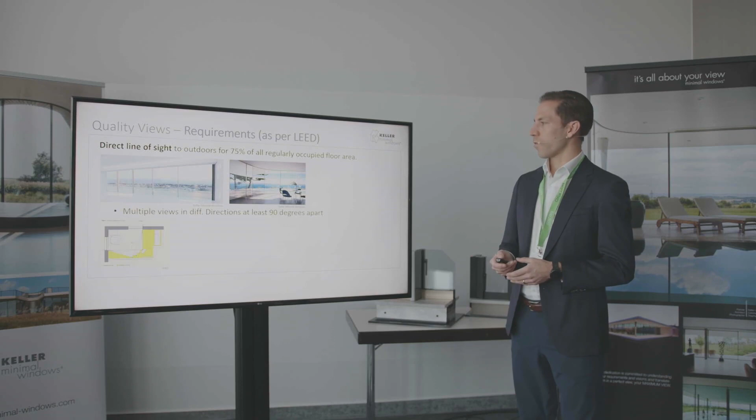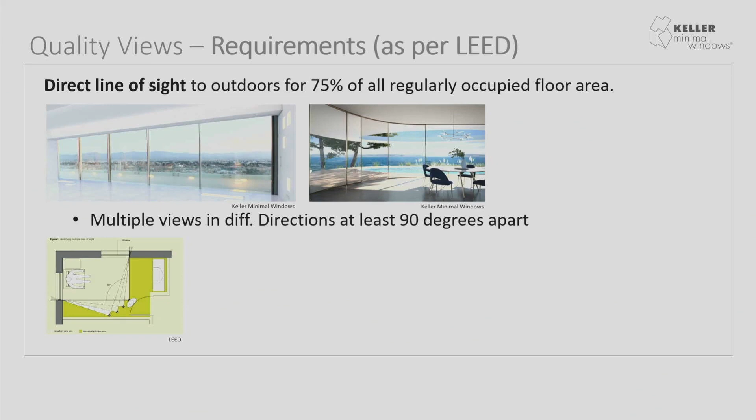We also need to have more than one sight line. So it's not enough to just have an opening right in front of us. We want to be able to pivot about 90 degrees and have a view that direction as well. It is associated with benefits to our well-being as well. And this would be an example of these two 90-degree views.

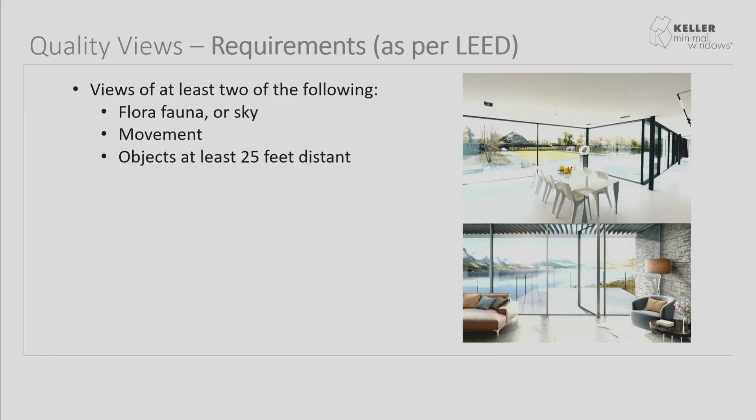Now, another requirement is that we meet at least two of the following three categories. We have to be able to see flora, fauna, the sky, movement, or objects that are at least 25 feet in distance. So it's not enough to have a big view, but a building right next to our building where we just look at a wall, that's just not giving us enough relief. And we can kind of see here where we really create that environment and feeling.

We also have to have an unobstructed view located within the distance, and that view has to be at least three times further away than the opening. So if we have a floor to ceiling opening that's about 10 feet, then we want that object to be at least 30 feet apart.

The third category is the view factor, and it's essentially rated by the angle of the view. We have to have a view factor of at least 3, which is between 1, the least, and 5, the best. The further our view opens apart, the more improved the well-being is. And so at 3, LEED considers this to be a quality view.

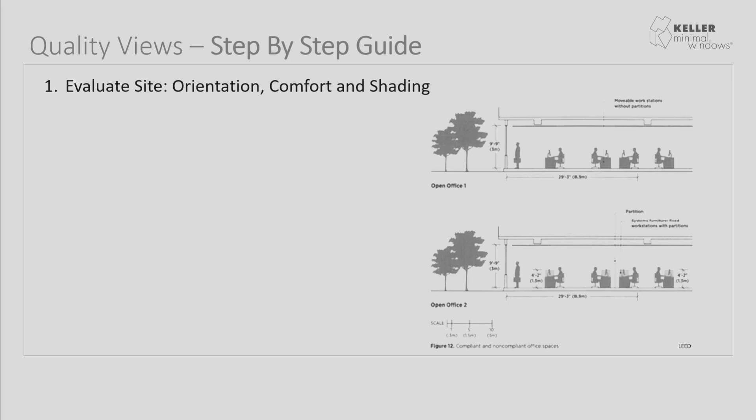Now, there's a step-by-step guide based on LEED to follow in building design to create quality views in a project. Now, we know that most of our projects, single family, may not go for LEED certification. Also, there's a LEED for Homes program, but architects in general, designers, builders, just following these categories and step-by-step guide, it could just be helpful to create quality views for occupants in buildings that may not be certified, because who wouldn't want a quality view?

Now, one, it's important to consider the orientation, the shading. So where are the views? Where's the solar heat gain coming from? That is obvious. We want to design for transparency. We want interior views. We want transparent partitions.

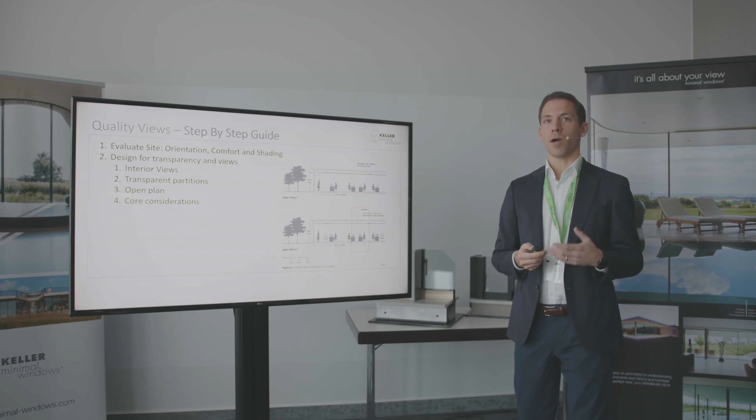In this case, we see here, this is an office room. This is open. We have a direct sight line, and this is closed up, which we see a lot more in older offices. So the people right behind there don't get that direct sightline access. So this would be a red flag for a project that will want a LEED credit. We also want an open floor plan, which of course in homes is something that we need to consider, so that the daylight really flows throughout the building.

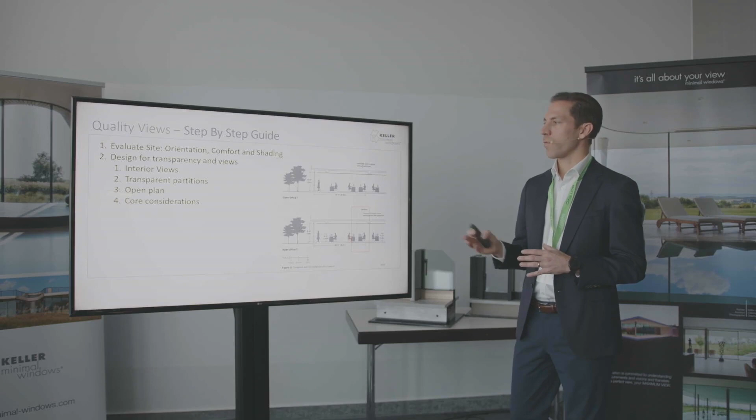And the core consideration is the fourth topic here. Core consideration essentially means if we have an office complex, we want to move the private offices to the center, to the core of the building, so that all the people working in cubicles on the exterior side of the building will actually have direct access to lighting versus only a few privileged offices.

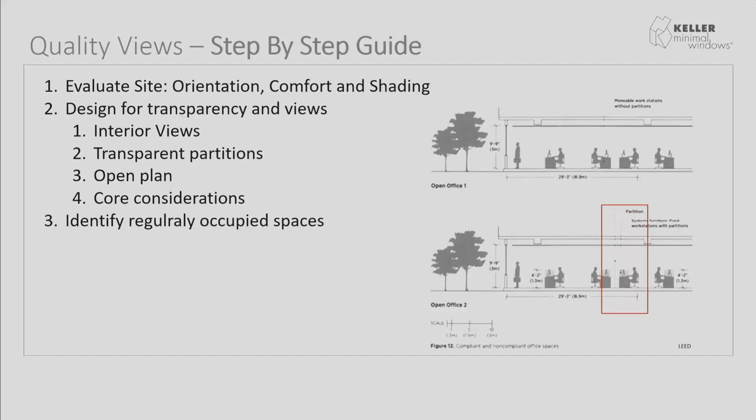Now, permanent interior obstructions, we mentioned that earlier. It's that next step to make sure that not more than 25% of these obstructions exist. And then consider design changes if those exist.

Now, the last two steps, essentially: we assess the view quality and confirm compliance. And this is just helpful for an architect or a designer working on a project to go through that step-by-step program and really check those boxes: list all regularly occupied spaces, what the floor plans, the sections, and the elevations look like, so that we have a good understanding that these occupants will have direct access to daylight and views.

And then last but not least, we go through these view types that I mentioned earlier: multiple sightlines, we want exterior features, no obstructed view, and we want to assess the view factor as well. So that's just a summary of the previous slides, and just a good habit to go through to check those off.

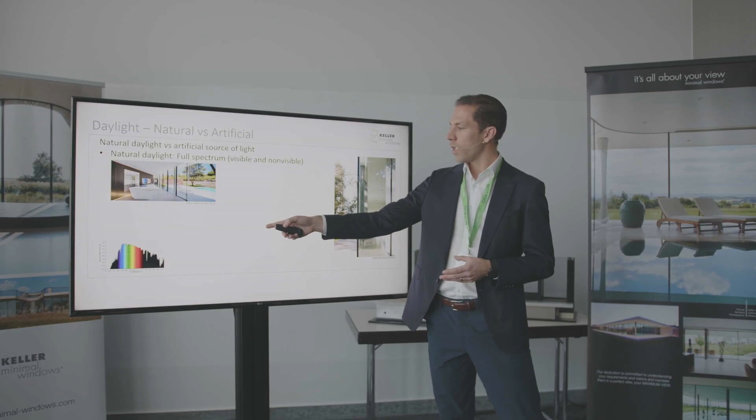Now, the next crucial topic is to consider natural daylight versus artificial light. For our well-being, it's extremely important to experience this vitalizing, rich daylight that we get from the sun, versus artificial light that really comes short of that. What we see down here is essentially ultraviolet ranges, from about 250 nanometers all the way to 950 nanometers. What this means is we cannot see this.

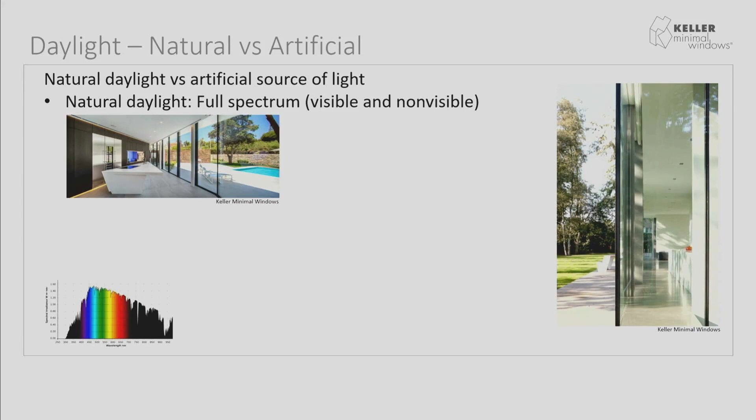The human eye can see light starting at 400 nanometers all the way to 700. Anything beyond is infrared light, causing heating. Anything below, some of it is for the birds. Birds can actually pick up ultraviolet light. We can't. Now, this is the spectrum we can see, and each nanometer wavelength has a color. So if we see reddish light at the end of the day when the sun is going down, that is because the solar radiation wavelength is about 600 to 650 nanometers. This is what we need for well-being, this vitalizing, rich light.

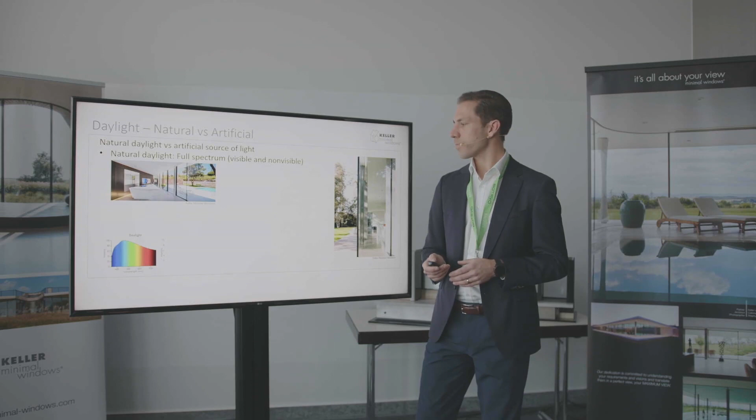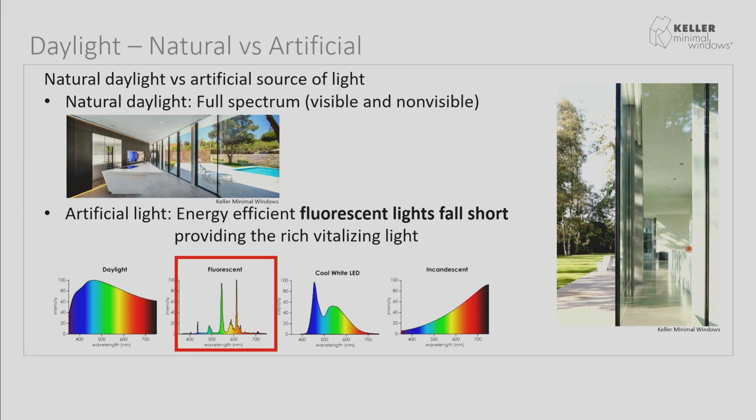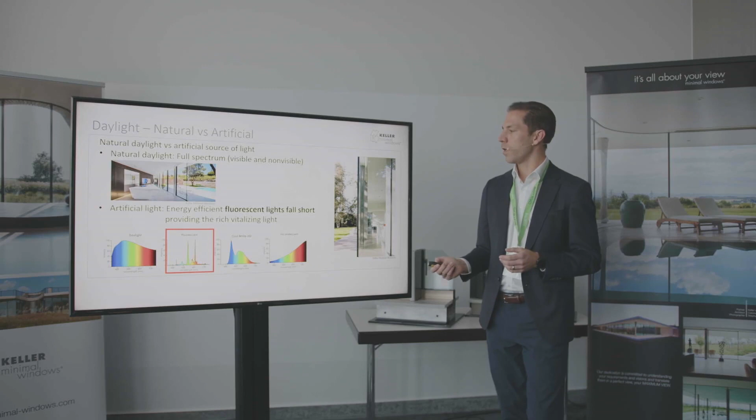Now, fluorescent lights, particularly energy-saving lighting, fall really short of this. We can see the vitalizing daylight, and we can see how the fluorescent light falls short of it. There is a peak at 600 nanometers, at 500, and at 550. The human eye is most sensitive in that range, and this is why they're spiking in these areas here. But it falls short of it, so it really is not what we need to be healthy and to feel good.

Now, daylight and its benefits. Again, we didn't come up with this. We follow LEED guidelines, and LEED considers certain intents and benefits: connecting building occupants with the outdoors for health and well-being reasons, reinforcing the circadian rhythm, which is very important, and reducing electrical lighting from an energy perspective, which is important as well.

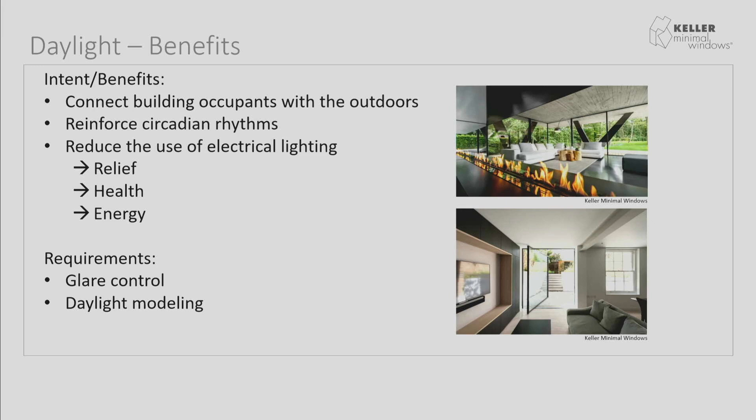We want to make sure that we control the glare, and something that we see more and more is daylight modeling. We want to make sure that the light is really penetrating into the building. This large pivot door in this essentially underground apartment makes a huge difference for this occupant, obviously. With energy performance, the intent is to improve the energy performance. Now, from an operational perspective, we need to reduce the carbon emissions in our buildings.

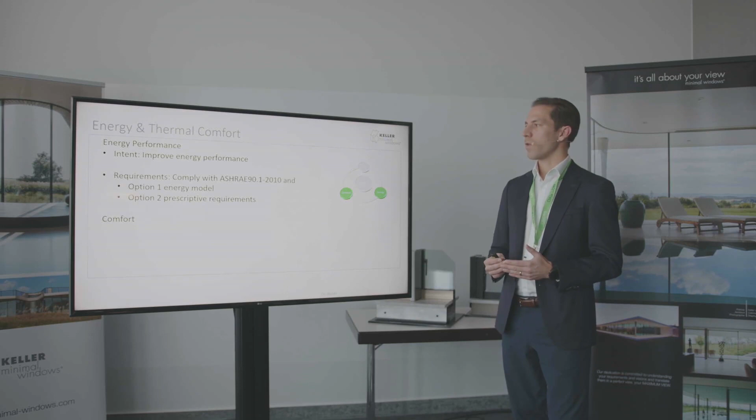And having more daylight, meaning we don't have to turn the lights on, and that helps. Requirements. In the United States, we comply with ASHRAE 90.1, in this case 2010 I'm listing here. There's two ways to follow that guideline: energy modeling, so the performance path, or the prescriptive path.

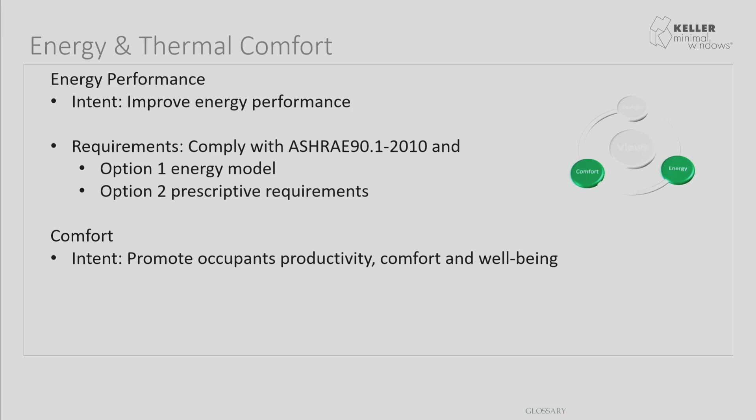And most single-family projects follow the prescriptive path, where we know what kind of U values we need, what kind of solar heat gain coefficients we need, and of course the products that Keller Minimal Windows offers there that meet those requirements. Comfort is an important one. It promotes the occupant's productivity, comfort, and well-being.

And this is important, and there's requirements as well, but it's important to point that out, particularly in cold climates. If we have the surface of the glass interior deviating further than about 7.2 Fahrenheit from the internal set point in the room, which is typically about 68 Fahrenheit, that creates an uncomfortable draft. And that uncomfortable draft, if we are working, sitting, living close to our sliding doors or windows, that's causing health issues.

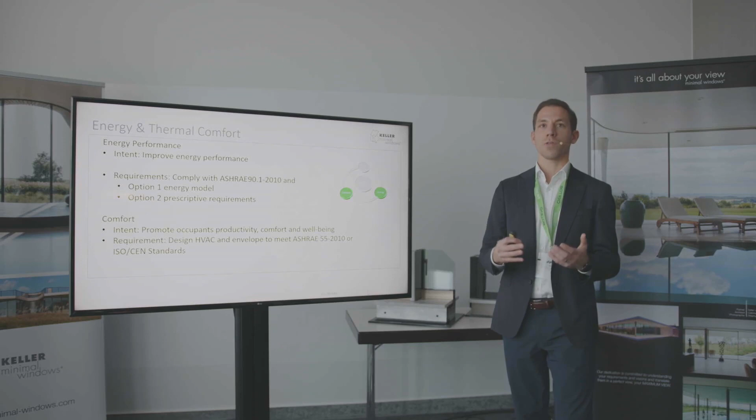Now, just a quick update here. How do we enhance the performance of the sliding doors and windows? The glazing layers, single pane, double pane, triple pane. By the way, in Europe, it's about 70 to 80% triple pane use. In the United States, that is really not the case. So there's really room to improve, particularly from a comfort perspective.

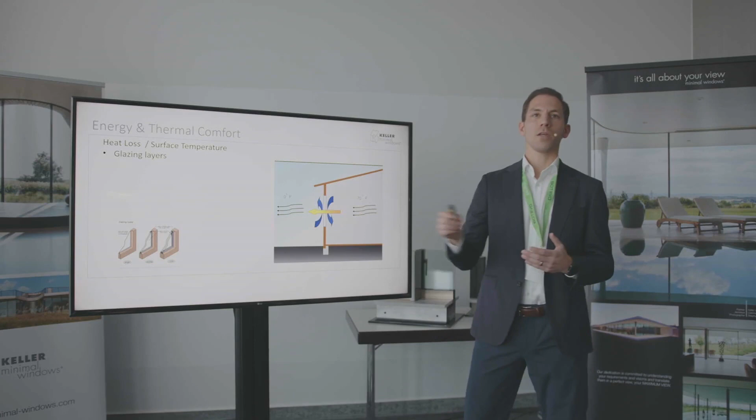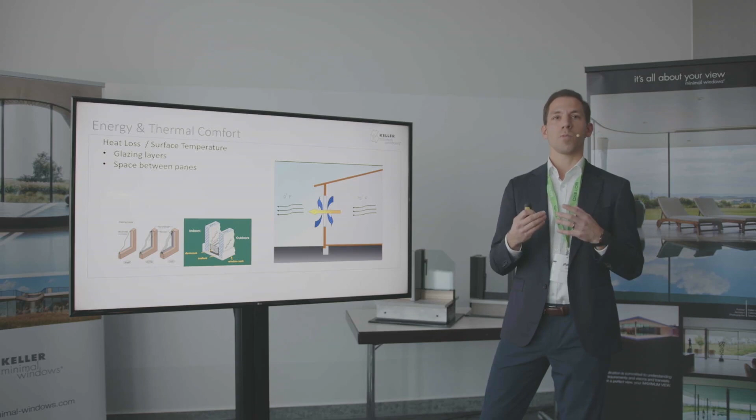Moving from a single pane to a double pane, the energy savings is crucial. It's enormous. From a double pane to a triple pane, the energy savings is not as large, but the comfort and potential moisture issues might be an issue if we don't go that extra mile. Now, of course, we have the space between the panes. We want warm edge spacers. When you specify spacers on projects, the industry can provide them. Go away from the aluminum spacers and use those warm edge spacers.

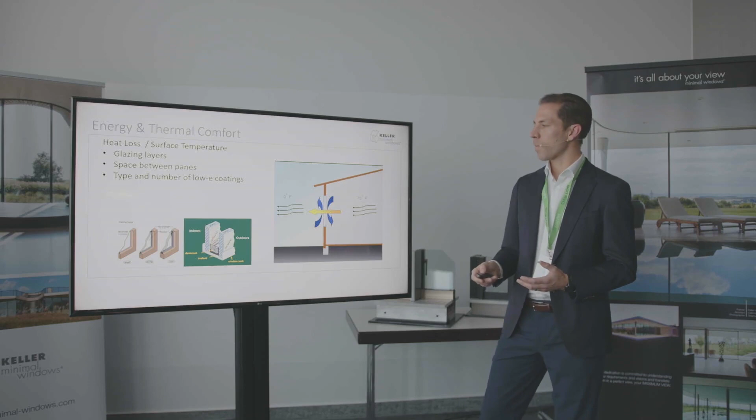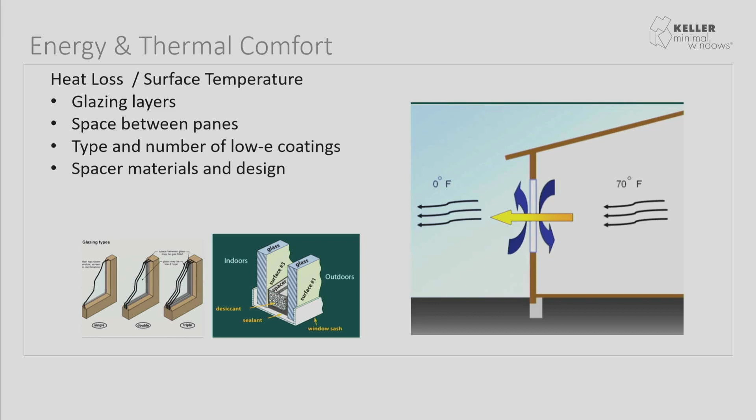The type of the low E coatings. A low E coating, solar reflective coating, reflecting the solar radiation from the outside, reducing heat gain, and reflecting the long wave thermal radiation from the inside, keeping the heat in the building, obviously. Spacer materials and design, and the sash and the frame. In this case, this is a wood window, but the same is true for an aluminum, a UPVC window.

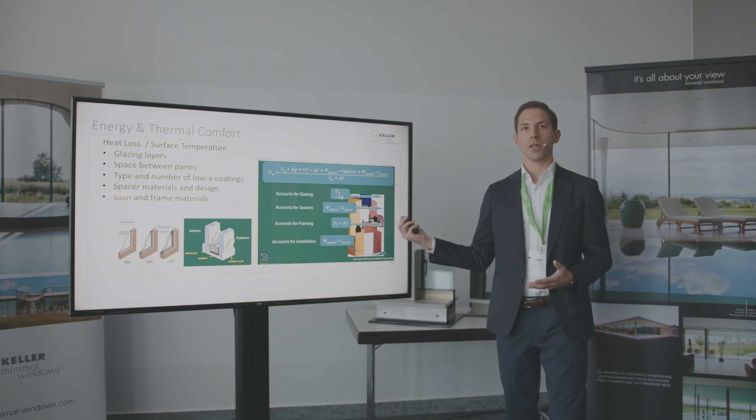The performance of the window is a total of the glass, the spacer, the frame, and how it's installed. And if I add all those up, I get to an overall U value of my system and window. We use energy modeling to model this, but you could technically calculate that by hand as well.

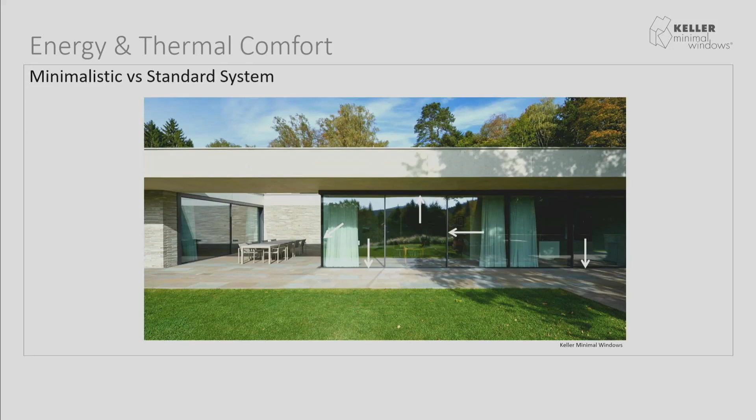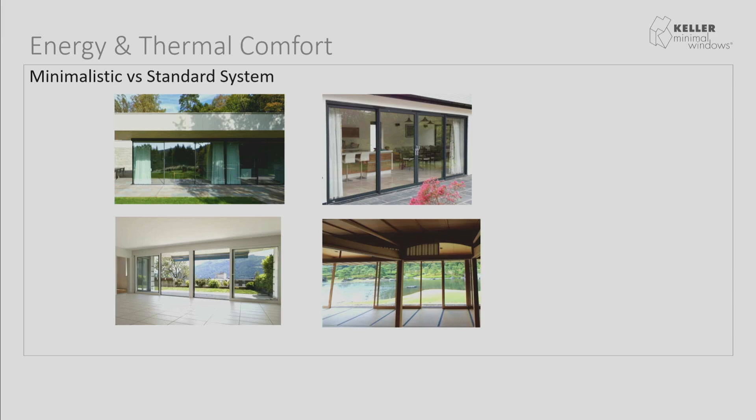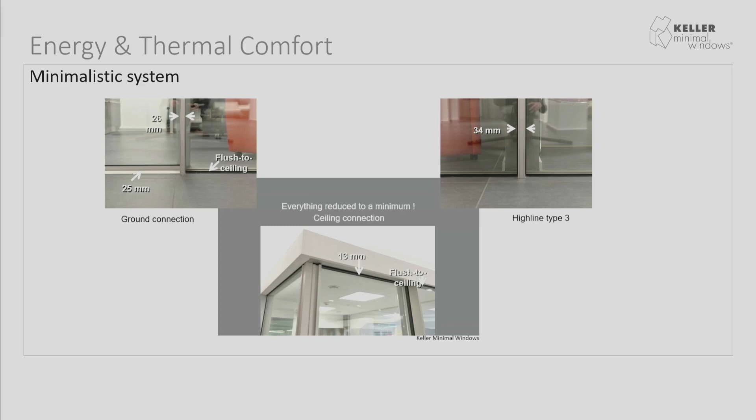What we consider minimalistic is the profiles here at about 26 millimeters in the vertical, in the horizontal about 25 millimeters. There's new systems now, for instance the Keller next slider generation, where we only have a 5 millimeter sightline here on the vertical lower end. So we want to be flush with the floor. We want that seamless barrier-free system, also to avoid trip hazards. And trip hazards, particularly in commercial projects or restaurants, hotels, are actually a big liability issue.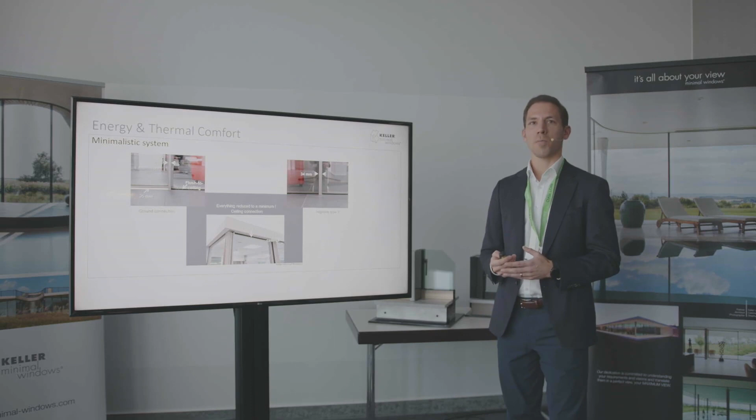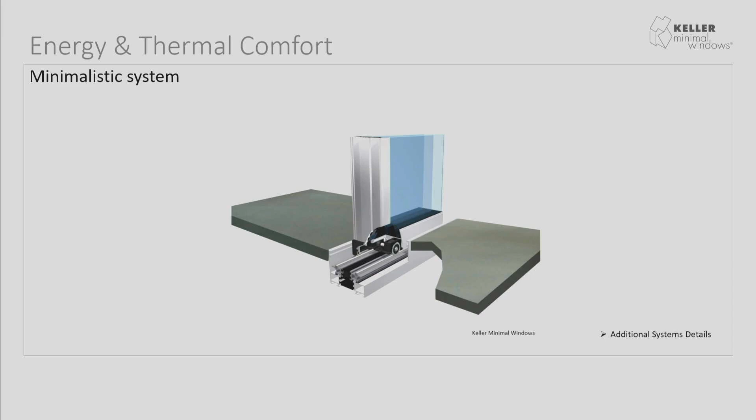Now the systems itself, in this case what we're looking at is a system that has the roller in the sliding element. They're stainless steel, so they don't corrode, something that the company learned over many years. There is a brush or a gasket right in front of it so that whenever we're sliding the system, we are cleaning the sliding rail, and that is very important considering the maintenance of these kinds of systems versus having the rollers in the bottom half where hairs and also dust can settle, and we may have an issue cleaning those.

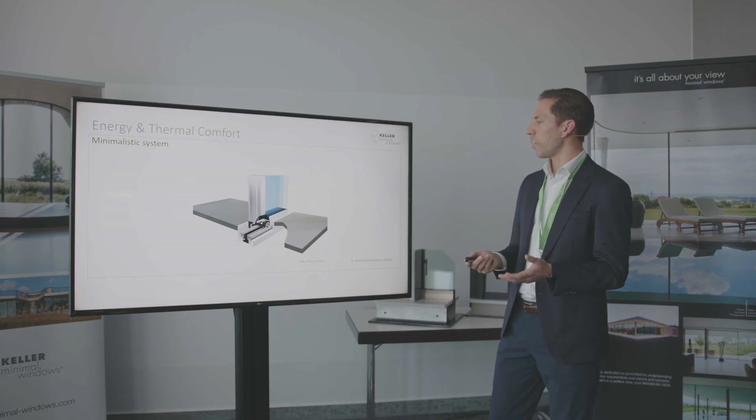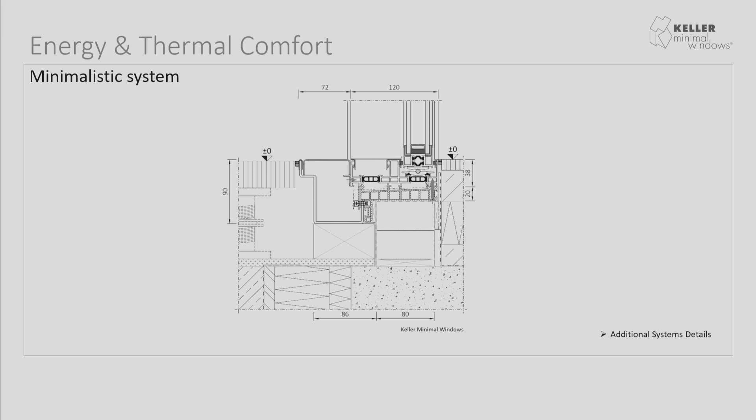Now those systems are thermally broken, and then obviously for project teams there's cross sections that can be provided. Thermally broken system, the drainage, unlike most systems in the United States, is already included. So we're not just putting a drainage sill plate down and screwing the system through.

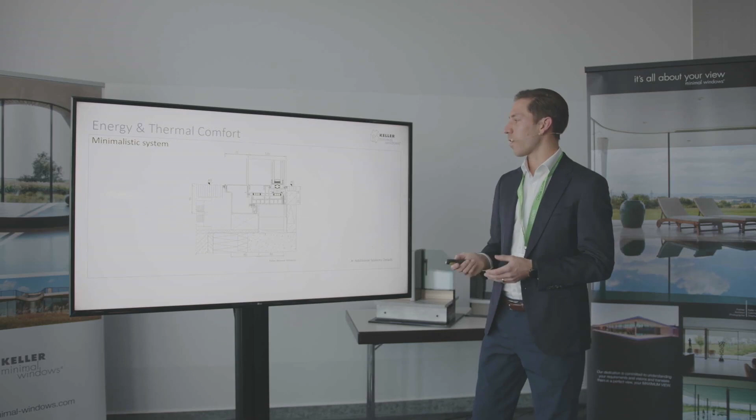No, there is a drainage system included. We're not going through the top. We're coming from the side so that we're not penetrating through the system, so it stays really watertight. Thermally broken, something very important. We don't want moisture issues. We don't want frost, so freezing in the system.

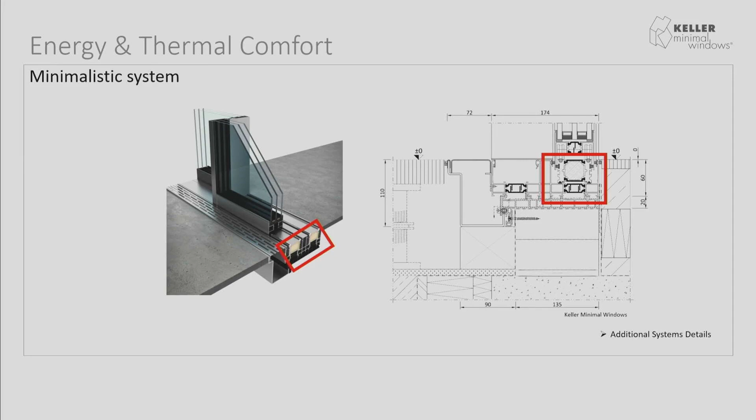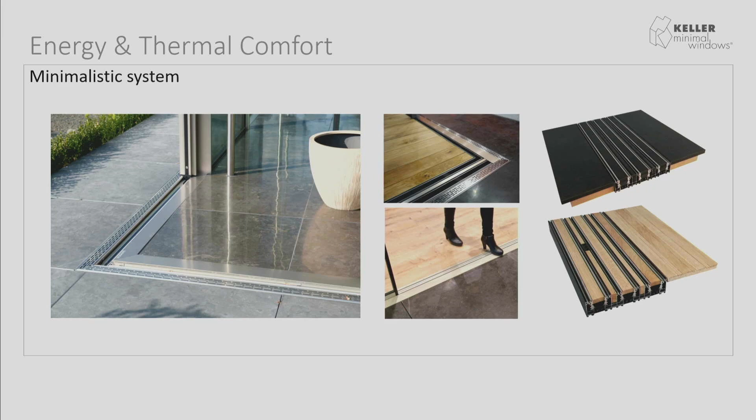So this is obviously something that in this case Keller really focused on to make sure that we have a good thermal performance. They're a barrier-free system, so we can kind of see how we move the material throughout the sliding tracks. There's no trip hazard here. We have the corner post free, so that's really what I like to see.

Looking at different materials, this is aluminum. Aluminum is highly conductive, but when you look at the double pane system, we're getting to a 0.19 BTU per square foot Fahrenheit hour and 1.1 watts per square meter Kelvin. Triple pane going all the way down to 0.17. So we're pretty much to passive standard, which is really amazing, exciting.

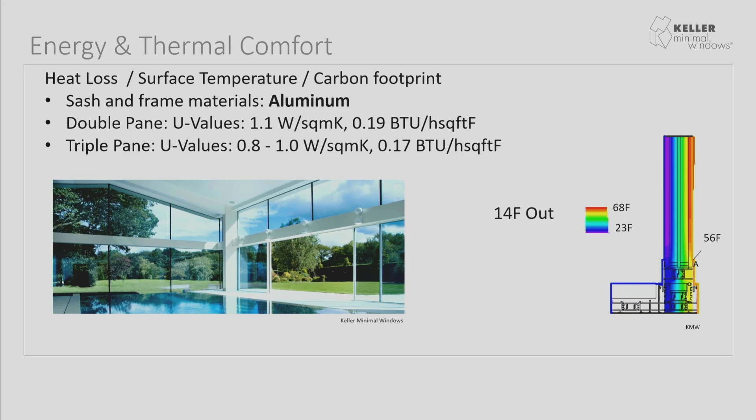And obviously we see the isotherm here. It's very cold outside, warm inside, and we turn this around, it will work as well. We see that the system is thermally broken and works really well. So although it's a conductive material, if it's used and designed in the right way, and a lot of engineering went into this, it is highly high performing.

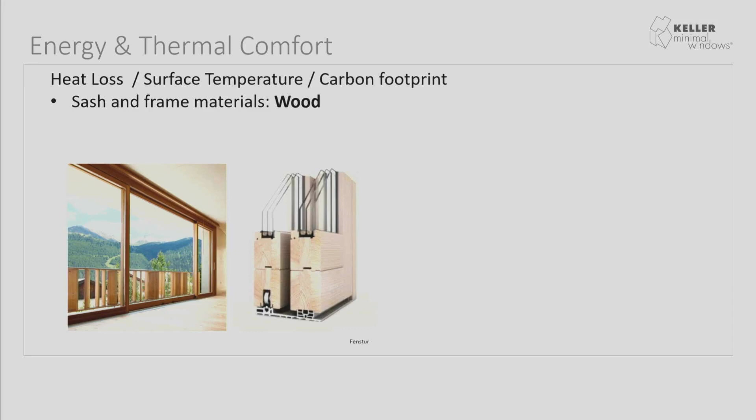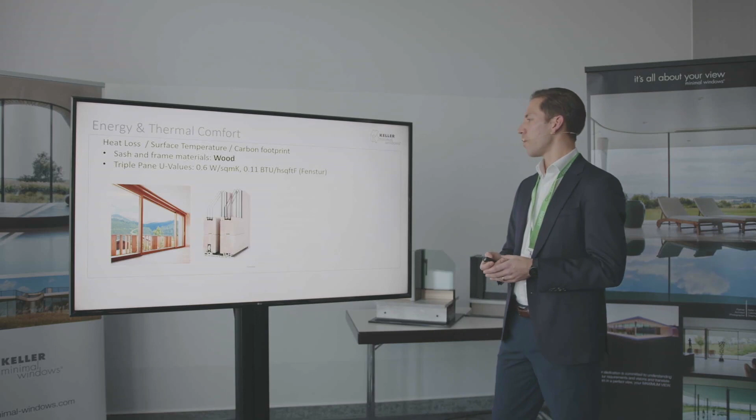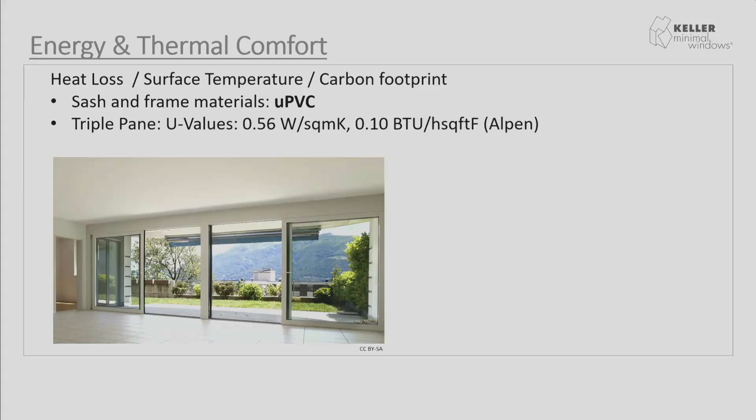And if we want to see that wood have that warm feel, then that is great. If we want a very slim, minimalistic system, it may not be the way to go. But the performance is really good at 0.11 BTU. So that's definitely something to consider. And then we have UPVC. Those are thermally broken as well, manufactured by Alpen. Now, of course, they're in this case not as thin, but well performing.

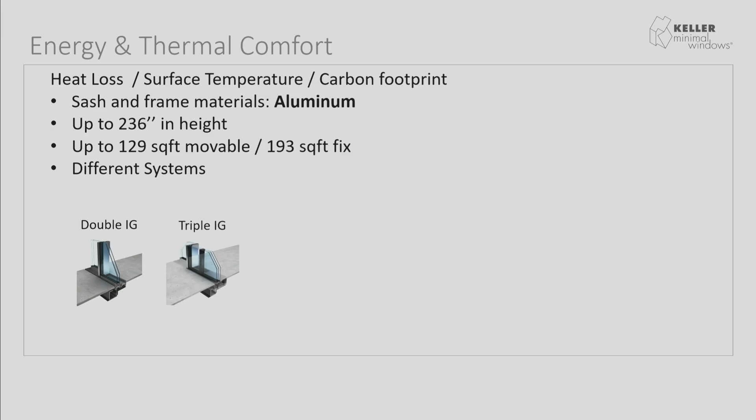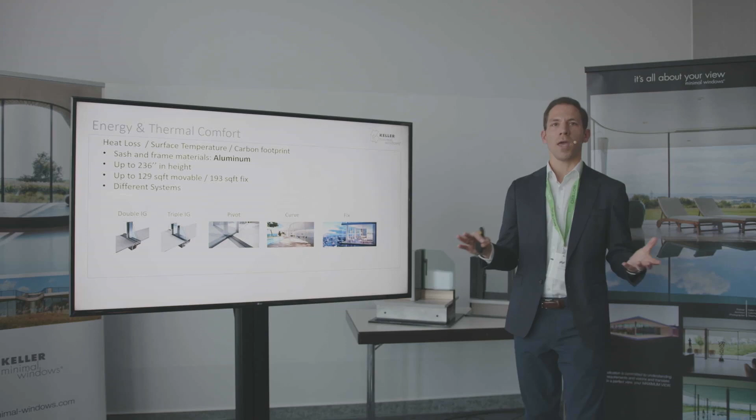Going back to aluminum, focusing on the topic of today's presentation, the heights are available up to 236 inch. Movable units, 129 square foot. Fixed units, 193 square foot. And different systems, as I mentioned originally, double, triple, pivot, curved, highlight, fixed. And these are systems that we see across the board with different manufacturers that are available in the market.

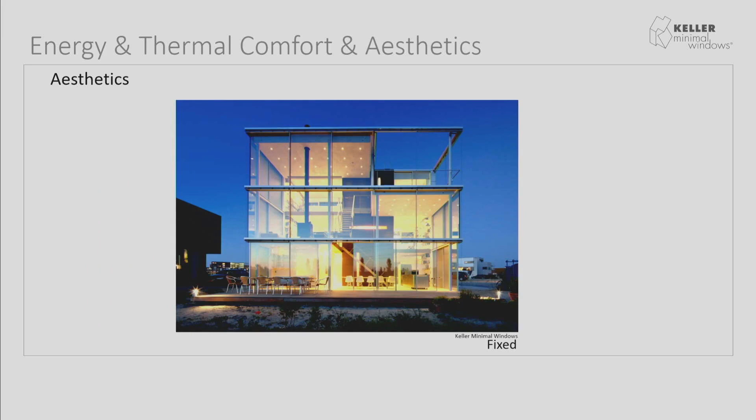And so I just want to show you some examples here, how they're used in a double IG project, a triple IG project. Obviously there we have a bit more reflectivity. We have those two low E coatings in that makeup. We have more glass, more reflection, so the appearance a bit different. The pivot door in this case here as well, and curved as well, something we see more and more. And then there's fixed elements as well that can be used with this material, aluminum.

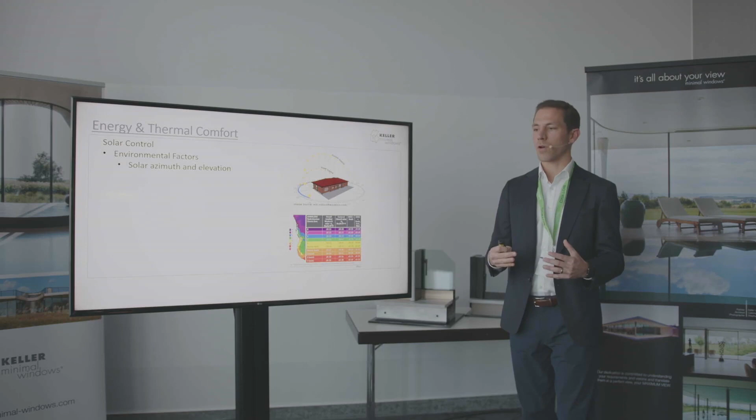Now, when we design buildings, there's environmental factors we need to consider. We need to consider the solar azimuth, the elevation. We look at how the sun moves around the building. When we work with a lot of glass in a building, this is something we have to consider. We have to consider what climate we're in, and how we're shading this building is something important as well.

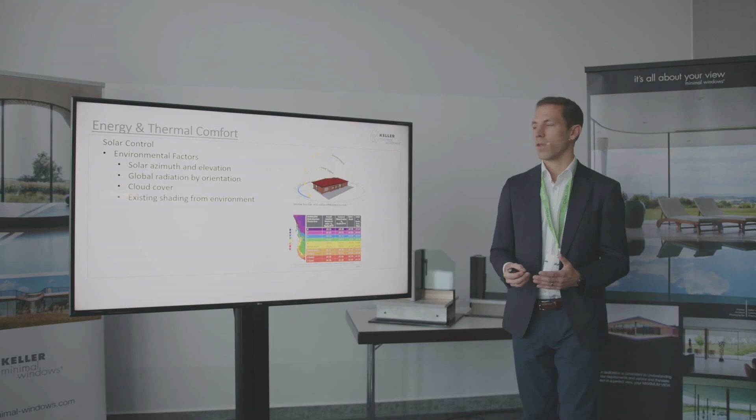Cloud cover, of course, for me being in Houston, Texas, there's a lot of direct sunlight. Being in Las Vegas as well, this may be a little bit different than being in the Northeast where we have a lot more cloud coverage. Now, existing shading we want to use, but we also want to use high performance materials. In this case, glazing with well-performing solar heat gain coefficient, which, for the newer architects that may not have heard of this: 100% of solar radiation hitting the surface of the glass.

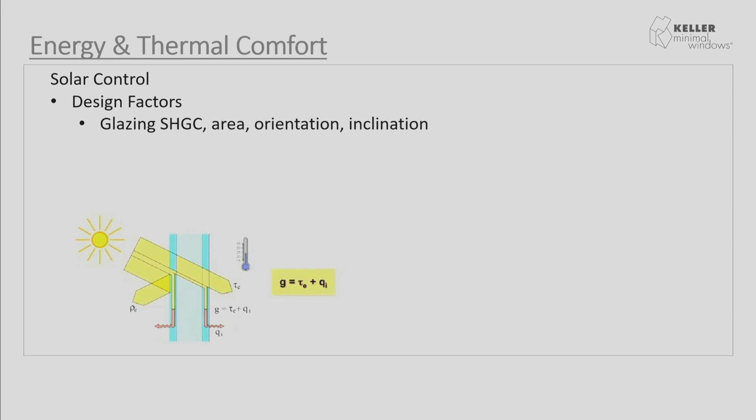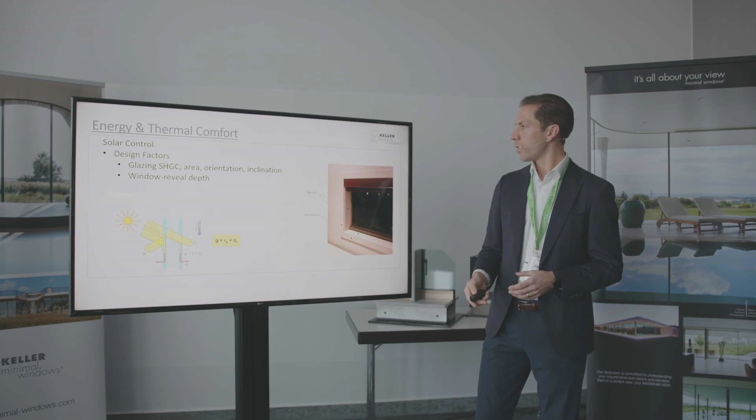Some is transmitted directly, some is absorbed by the glass, and then by radiation penetrated into the building. Solar heat gain coefficient is the percentage of that 100% getting into the indoors. And then there's the window reveal depth that can be considered, the window frame dimension, and of course the shading and the overhang. When we work with these large sliding doors, it is extremely important to consider how we mitigate heat gain and heat loss.

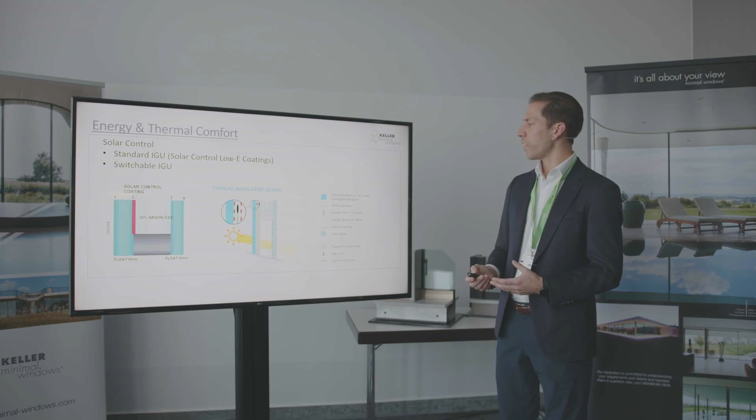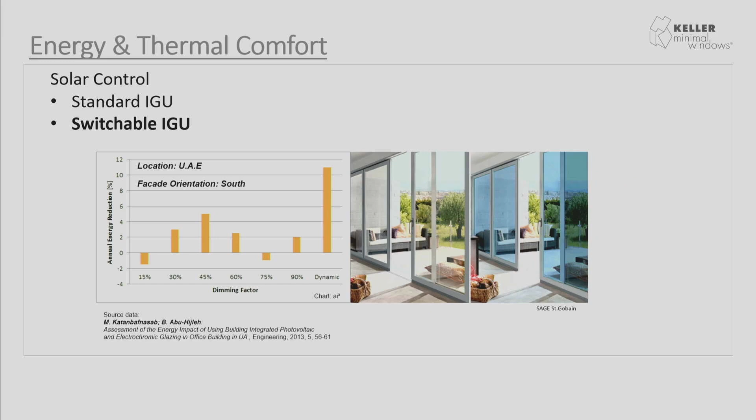This is a standard IGU. We don't have to go more into detail, but of course we can also use switchable glass types that become more and more popular, particularly in hot climates where we want to reduce the solar heat gain coefficient all the way down to 15% on a push of a button, and then move them all the way up to 35-40% if we want that passive heat gain. But then also, when the solar heat gain coefficient goes up, the light goes up. So it allows us really to change that visible light we're getting into the building.

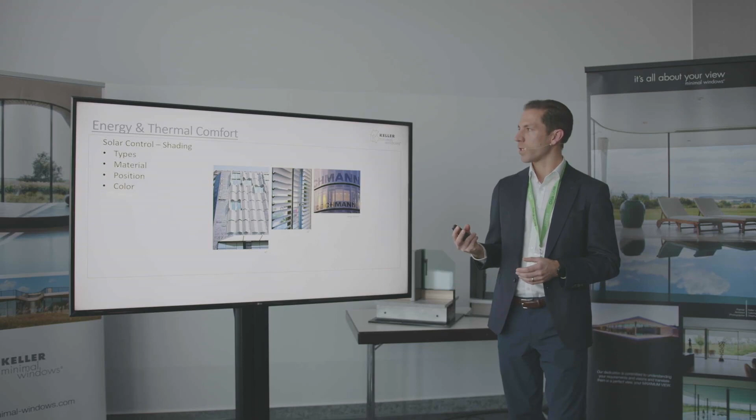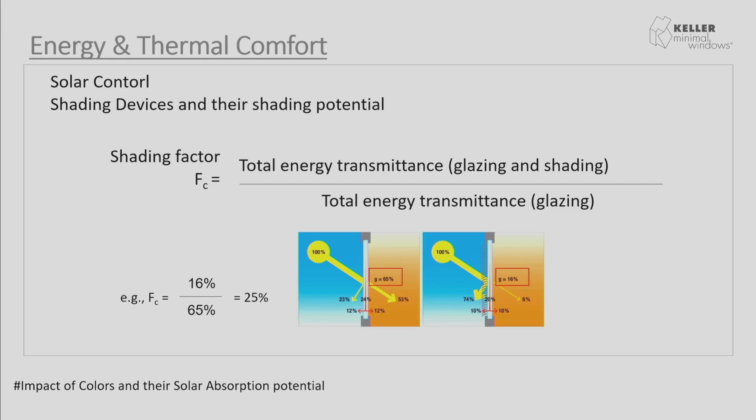Shading, types, materials, position, color, something we need to consider really quick. The shading factor. The shading factor essentially is the total energy transmittance, all the energy that goes to the indoors, divided by the solar heat gain coefficient of the glazing, essentially, and that's the shading factor. That's what we're talking about.

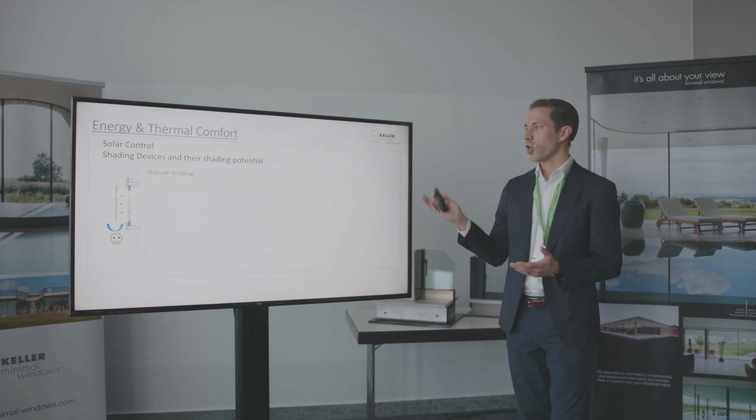And when we talk about shading, it's important to consider, where do we shade? In almost all projects in the United States, unfortunately, shading is done inside. It's not the case in Europe. We have shading on the outside. In this case, we're happy. We have a smiley face. We have the shading on the outside, which heats up. There's a chimney, a wide enough space between the shading and the glazing. The heat moves up, and it has nice room to move.

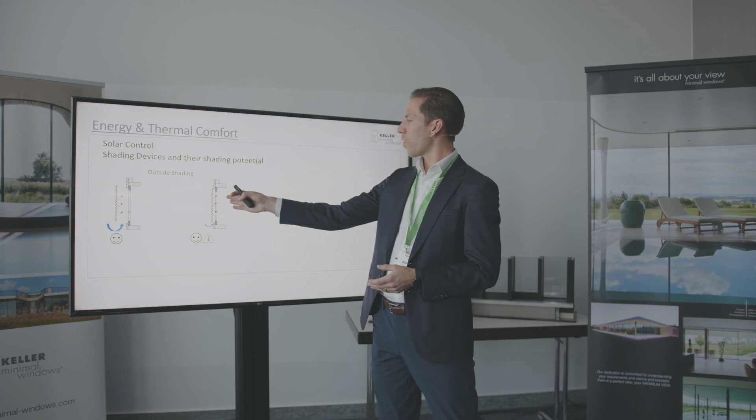In this case, we're too close to the glazing. It heats up. It moves through, but there's going to be some radiation that goes through the glazing into the building, and it heats up the building. Then we have inside shading, which we see in a lot of cases in the United States. If we had the opportunity to use this heat through an energy recovery ventilator or something, that would be great. But of course, we don't have that. Typically, we just have a standard blind.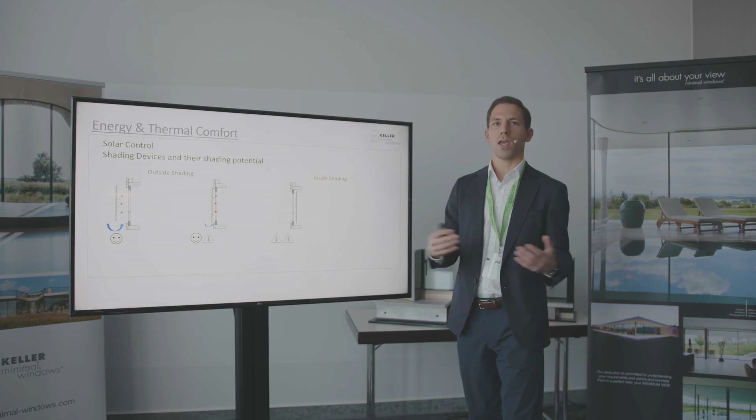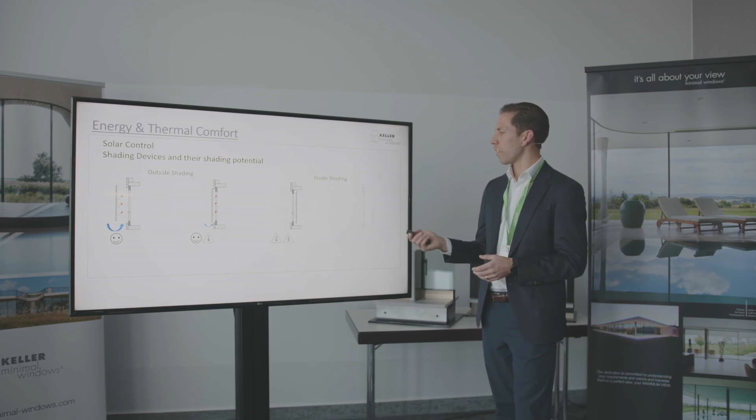The heat just goes up, it rises, it goes into the room, and now we have to cool. We get these peak loads. These peak loads causing us these high cooling air conditioning systems that are expensive, and they use a lot of energy. We can go further back, it gets even worse, so we really want to consider that.

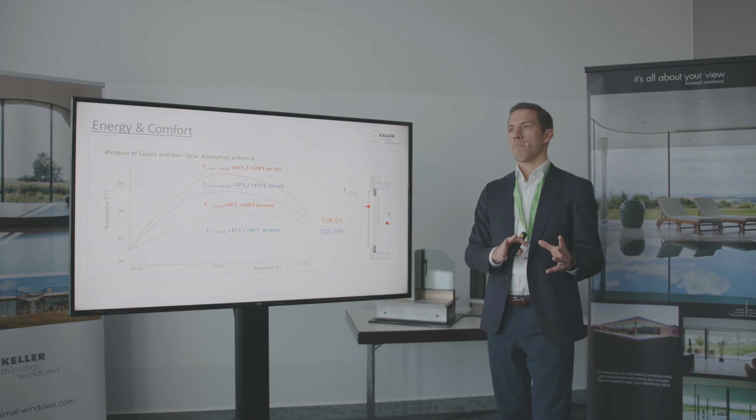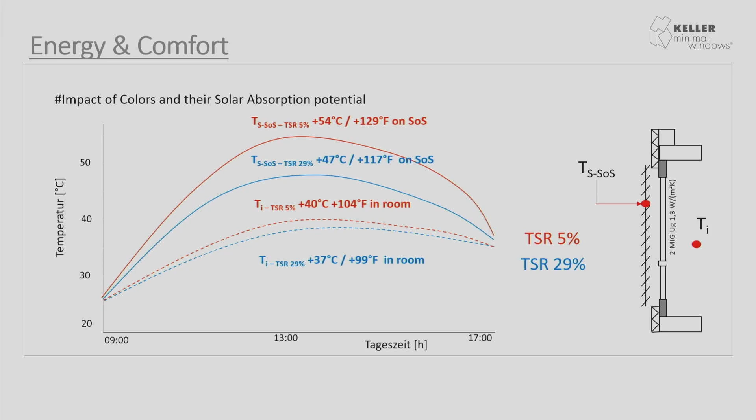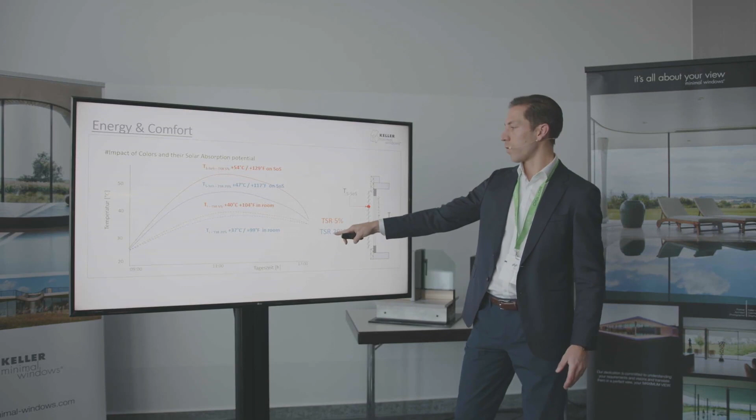Now, this looks like an overly complicated graph, but this is a really cool study that looked into the total solar reflectance of shading and the impact to the interior room temperature. We have a total solar reflectance of 5% in the shading and 29%. These two we're comparing, and what we really see is that the internal room temperature decreases by 3 degrees Celsius, by 5 degrees Fahrenheit, if we have that higher reflective shading material being used. Now, that is a lot. When we look at our energy bills, this actually makes a huge difference down the road.

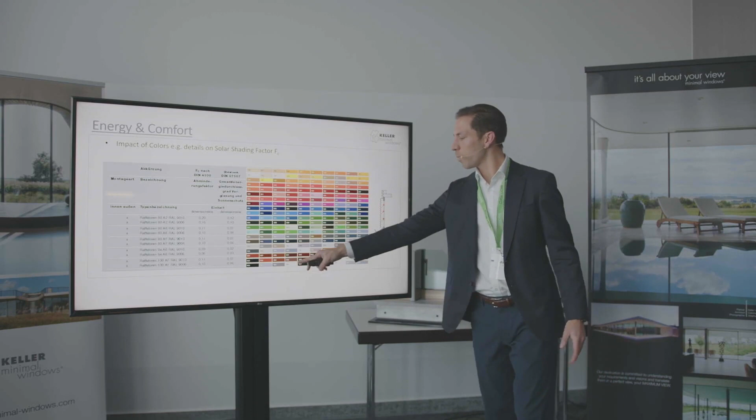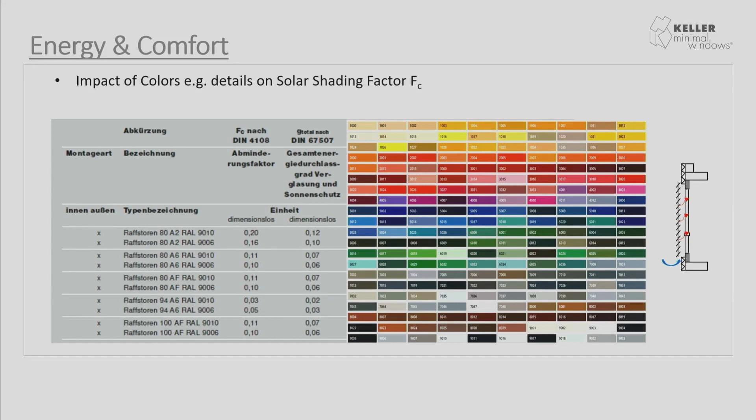Also, the color makes a difference. I always thought that white would be the most reflecting color, something to use if I want to keep heat out. It is actually the RAL 9006, sort of this bluish color that has the best solar reflective values.

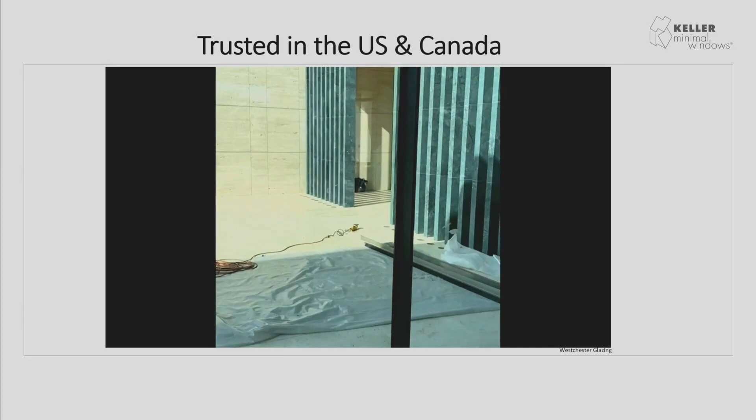And this is a short video giving you an idea on a project in LA, which is quite interesting. Keller realized a 6-track sliding system, which is unheard of, all motorized, and so really pushing the envelope to something that may not have been possible in the past. So we see here the tracks, 6 tracks, all motorized. A beautiful project in LA.